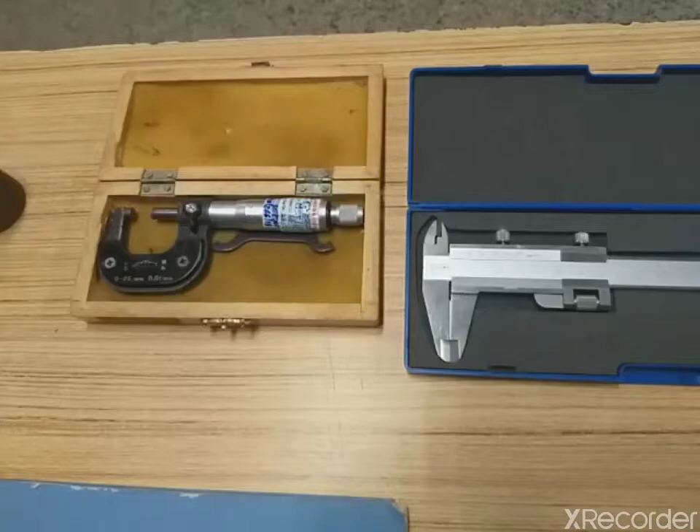In today's practical, we'll check how to use vernier caliper and micrometer for linear measurement. So the aim of our experiment is to study the use of vernier caliper and micrometer for linear measurement.

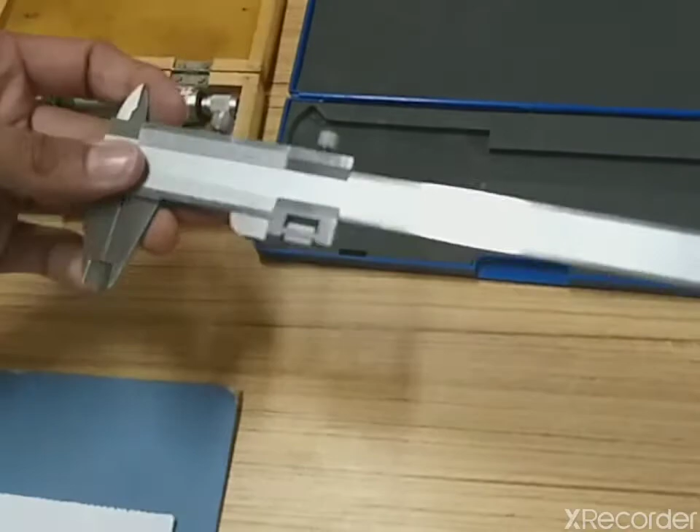So what will be the apparatus required? We will require one single vernier caliper with some specific range, then we will require a micrometer again with some specific range. But before use of this, we'll discuss a few theoretical parts related to this.

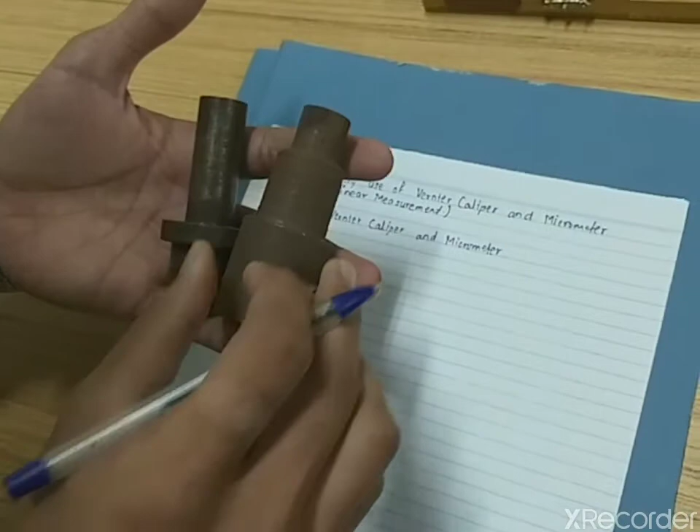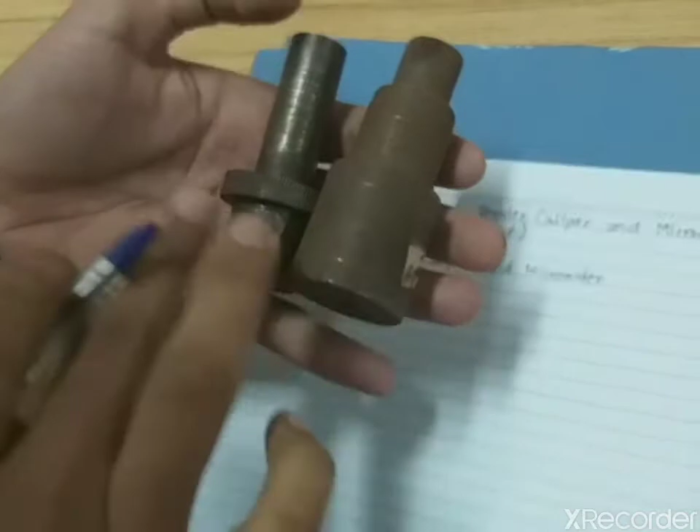So the required parts are vernier caliper and micrometer, and with that we'll require a few composite jobs whose dimensions are to be measured. Why do we call this a composite job? Because we have a number of dimensions for this, that is we can measure the length of this component or the diameter of this component. Similarly, we can have other parameters which can be measured with the help of these two experiments.

So before moving to the vernier caliper and micrometer, some theoretical part will be required. That is, important is what is the least count of any experiment. So before using any of the instruments, we should always know the least count of that specific instrument.

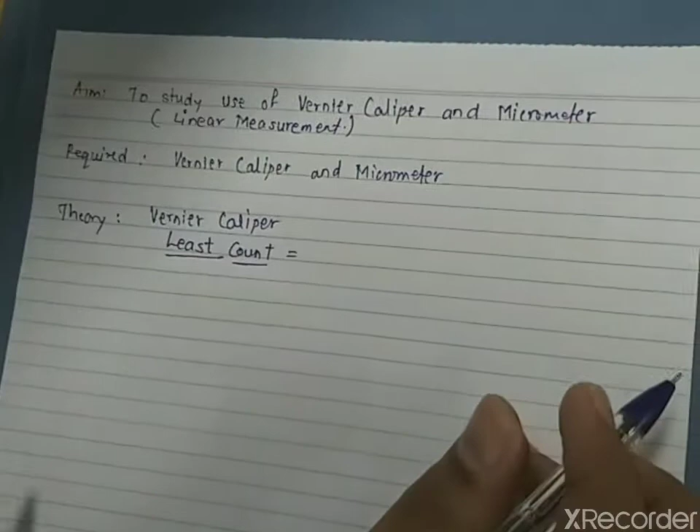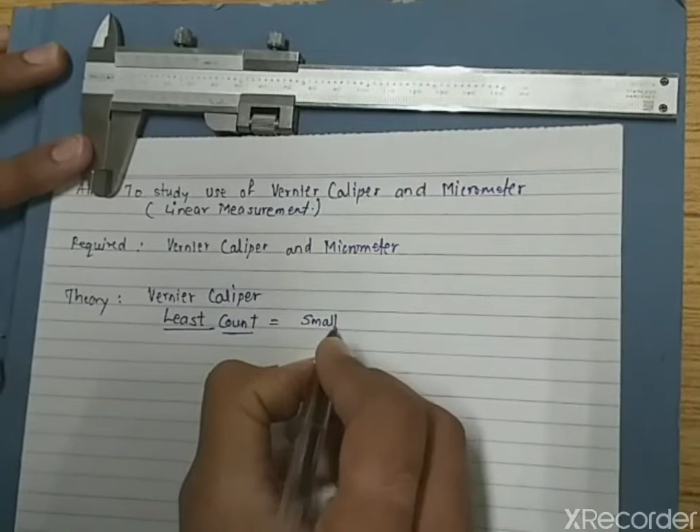So when we are dealing with vernier caliper, what will be the least count of the vernier caliper? For that, we should know the formula: least count of vernier caliper is nothing but smallest division on main scale, MS, divided by total number of divisions on vernier scale.

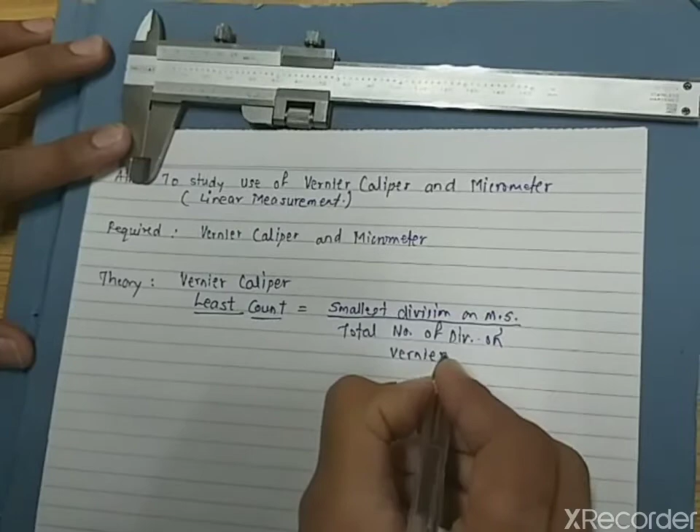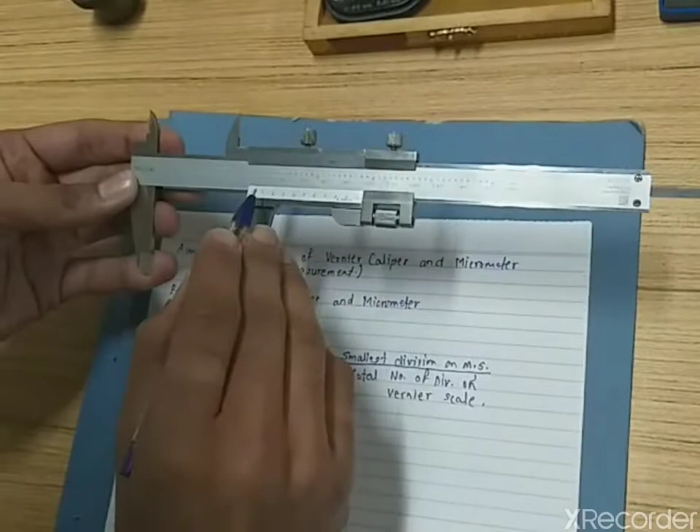So what is main scale and vernier scale? First we should understand. Now if you observe this instrument, this base scale is nothing but the main scale. With that, this movable scale which has some graduations on it, maybe in millimeters and in inches, is called the vernier scale.

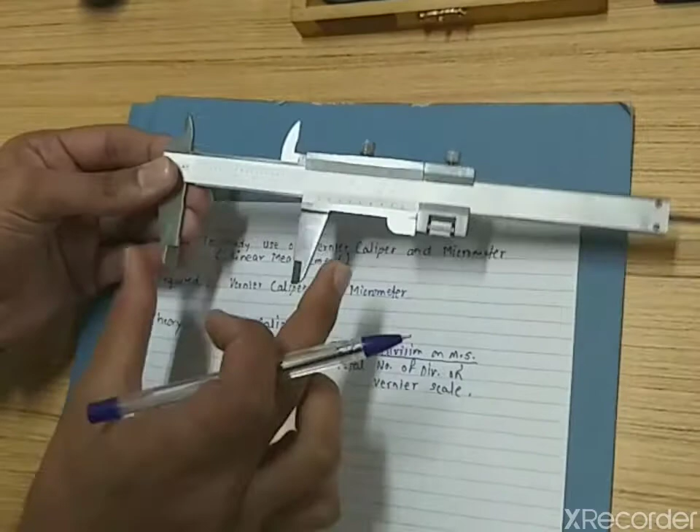Now what are the different parts? These two types of jaws are called external jaws, 1 and 2. These two components measure external parameters, whereas these are the two internal jaws of a vernier caliper.

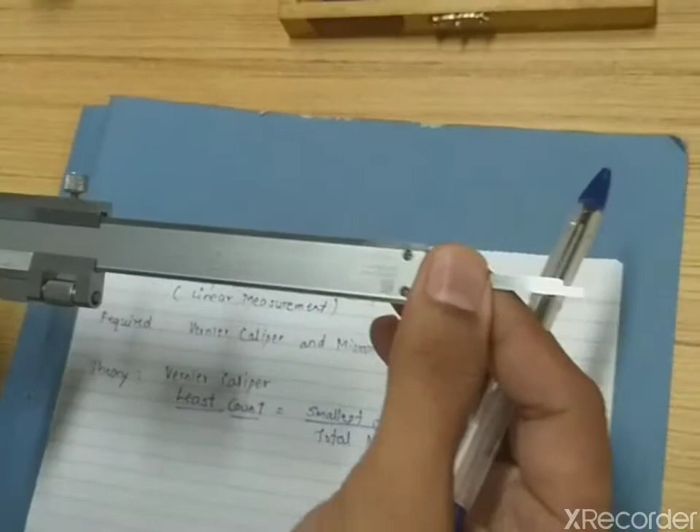With that, we have a ratchet screw for locking purpose when we use it. Another head part we have is this one, which can be used for measurement of depth of any of the component.

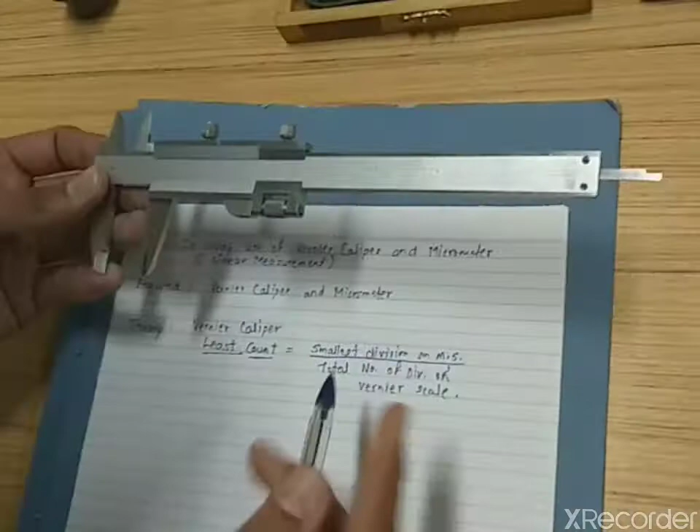Now we'll see how to use this. Before that, we'll first calculate the least count. So smallest division on main scale - if you observe it, 1 centimeter is divided into 10 parts. So obviously we can see 0 to 1, so smallest division on main scale is 1 millimeter, that is 1 mm, divided by total number of divisions on vernier scale.

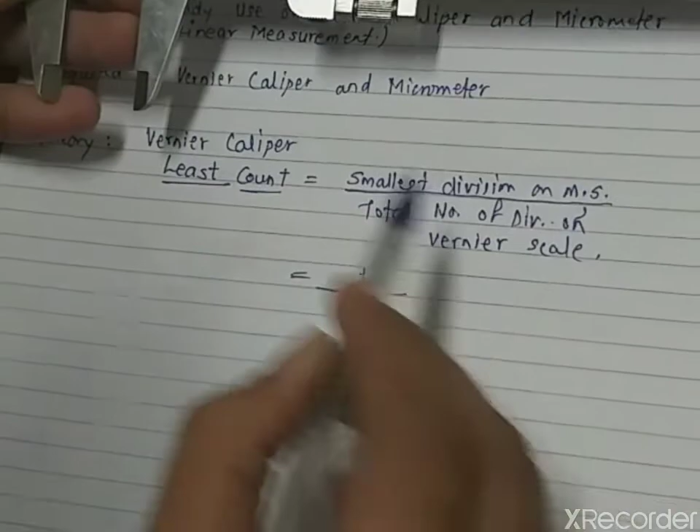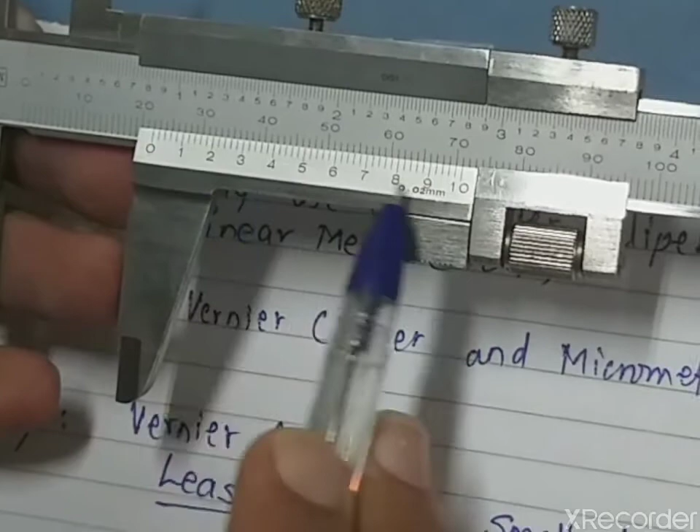This you can observe is nothing but a vernier scale. So how many divisions are there on this scale? If you observe, 5, 10, likewise till 10 we have, so total divisions are 50. If you observe total divisions: 1, 2, 3, 4, 5, 10, 15, 20, 25, 30, 35, 40, 45 and 50. So total number of divisions on this vernier scale is nothing but 50.

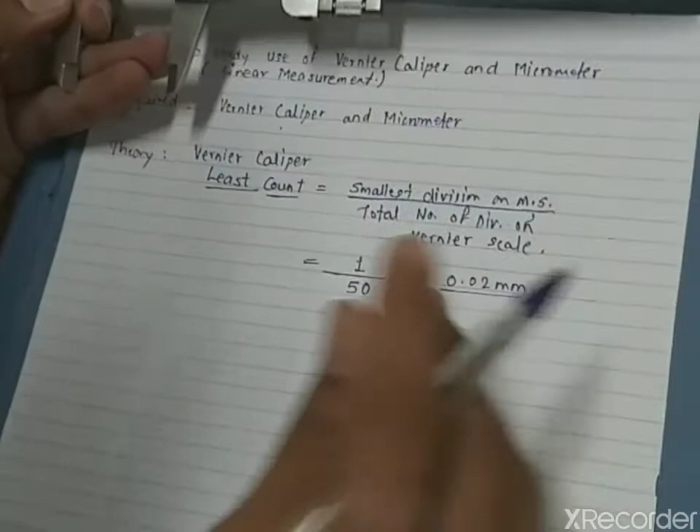So if you go for calculation, the least count will be 1 divided by 50, which is given as 0.02 millimeter. So what does this least count indicate? It indicates the smallest division which can be measured with the help of vernier scale is nothing but 0.02 mm. So this is about the least count of this vernier scale.

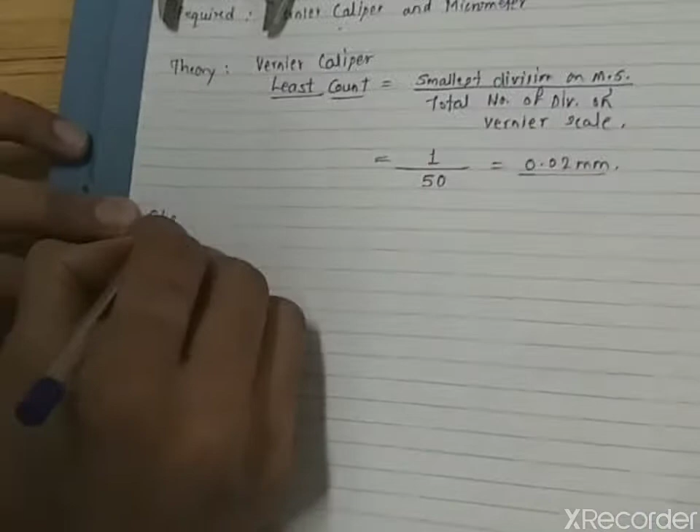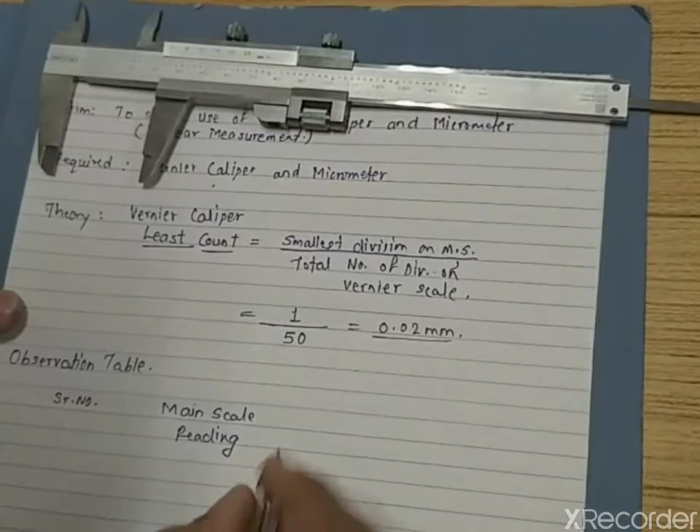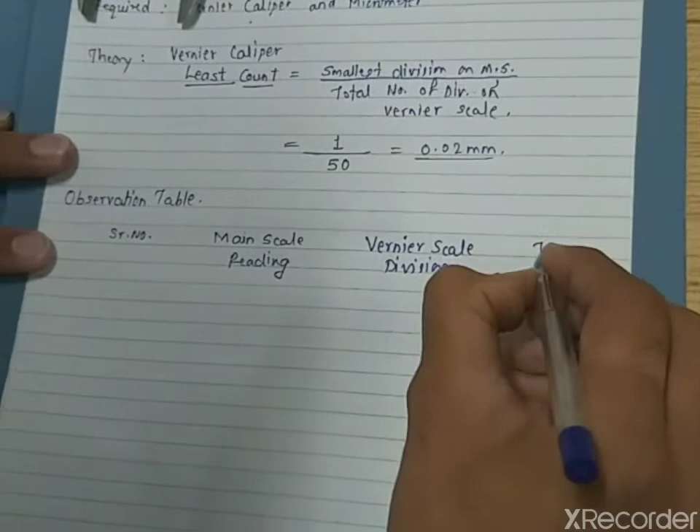Now before moving to micrometer, I will tell you how to take the reading. So I will write down the observation table for this. Now I will note down serial number, that is how many readings we are going to take. With that, main scale reading, vernier scale division, and total reading - so we will have four columns.

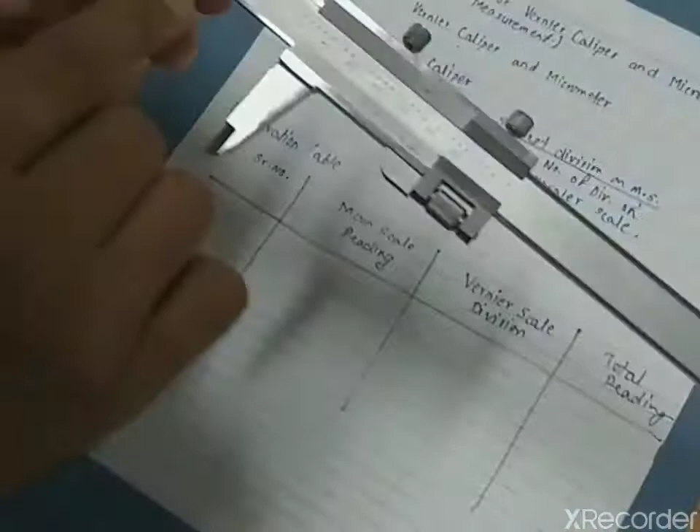So my first reading, I will show you how to use it. I am having one component, will measure the total length of this. So before measuring, what I told you - smallest division on main scale is 1 mm, whereas total number of divisions are 50. That means 1 divided by 50 is given as the least count of this experiment.

Now I will just hold this component. How to take the reading? Just hold it - this supporting grill part can be used for moving the movable jaw. Now simply hold this, we can have one set of reading over here. Now if you observe, how to take the reading - main scale reading will be nothing but, if you observe this 0, the division which is just coinciding with 0 or before the 0 will be your main scale reading.

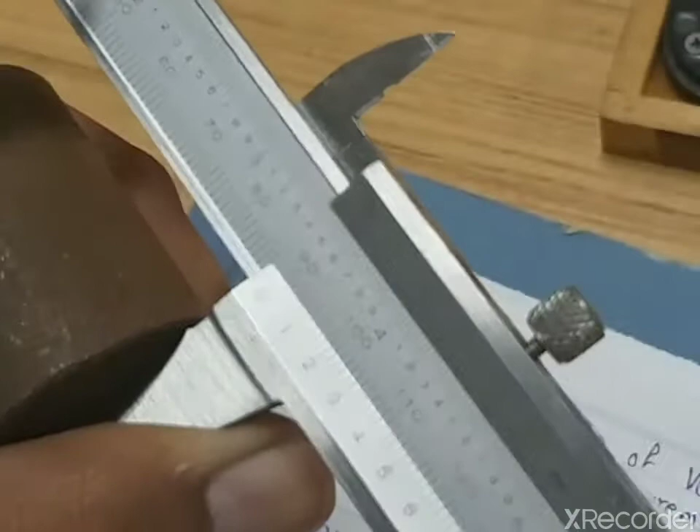Now over here if you observe, 0, 10, 20, likewise, so we have 80, 85, and just before 90 the main scale division is there before 0. So that means main scale reading is 89. So we can have 89 as the main scale reading if it is clearly visible.

So main scale reading will be 89 mm, 80 plus further we have 9 divisions. Now if you observe this gap, exactly it is not coinciding with 90 as well as 89, it is in between 89 and 90 mm. So what we can say is that middle part is to be taken with the help of this vernier scale.

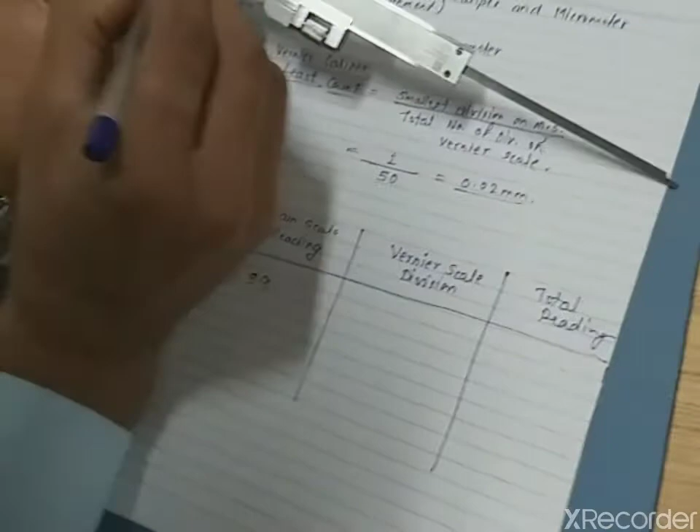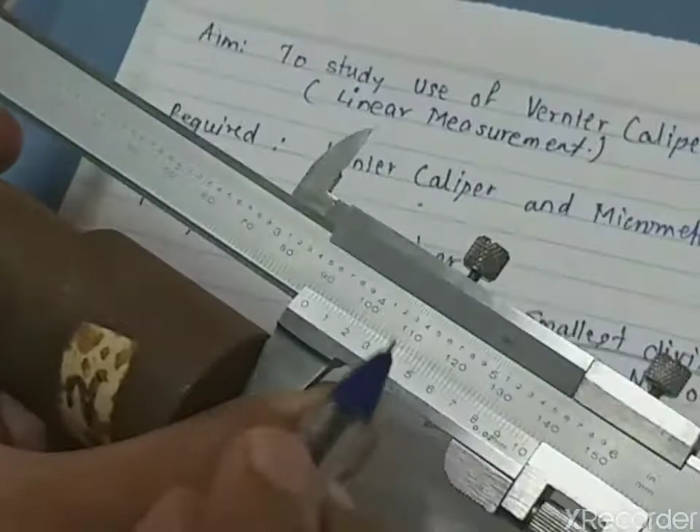Now how to take this? 89 mm we have got as a main scale reading. Now vernier scale division will be nothing but the division which is just coinciding with any graduation on the main scale. Now if you observe which one is coinciding, I will just observe it. You have to observe it perpendicularly because to avoid the parallax error.

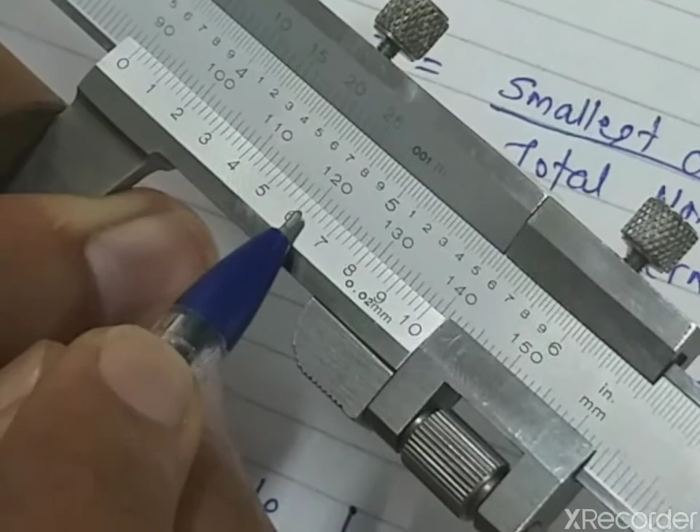So if we will check, we have exact coinciding division, we can say will be this. That means 5, 10, 15, 20, 25, 30 and 31st. So 31st division is nothing but vernier scale division, that is just after 6, which is 1, 2, 3, 4, 5, likewise 5, 10, 20, 25, 30, and 31st number division if you observe it is exactly coinciding with the main scale. So our vernier scale division will be 31.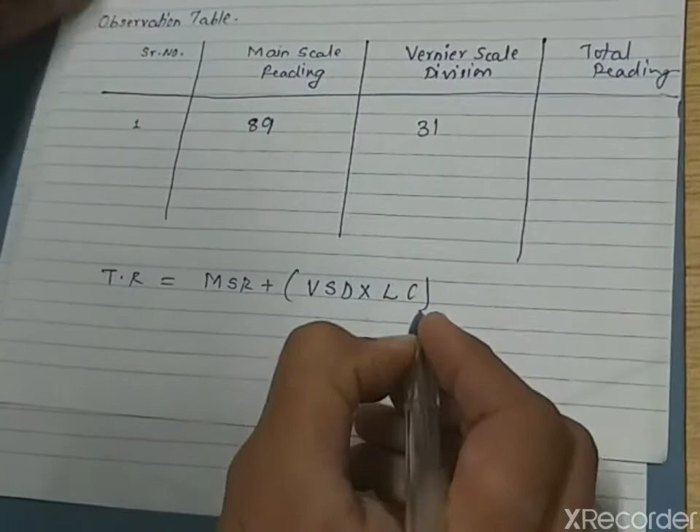Now how to calculate total reading? So for that we will require one formula. Total reading, I will write down as TR, which is equal to main scale reading MSR plus, in bracket, vernier scale division into least count of the experiment. So least count of this instrument is 0.02. So our total reading will be, main scale reading is 89 plus vernier scale division is 31 multiplied by least count 0.02.

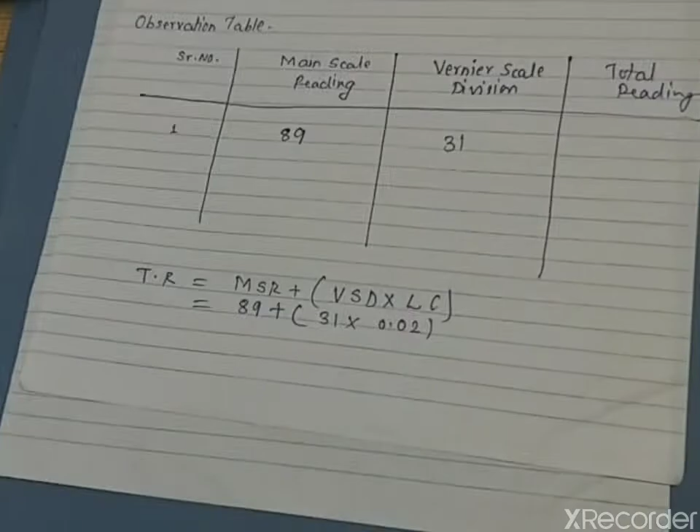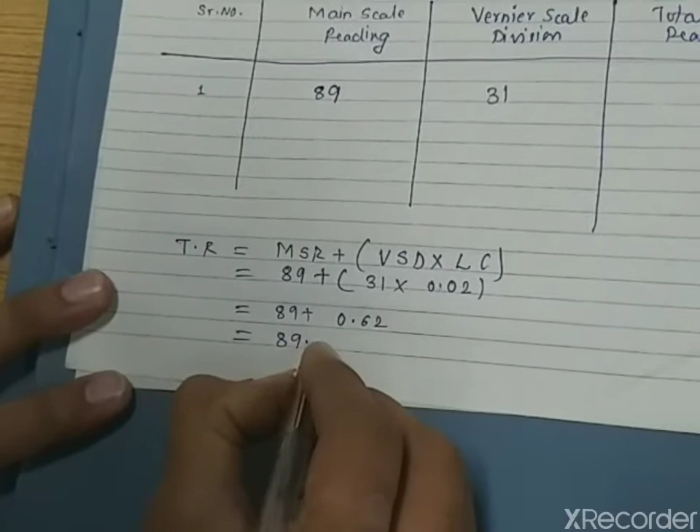So we can say that what will be total reading? It will be given as 89 plus 31 into 0.02 mm. So it will be equal to 0.62. So total reading will be equal to 89.62 millimeter. So reading, that is total length of this component, is given as 89.62.

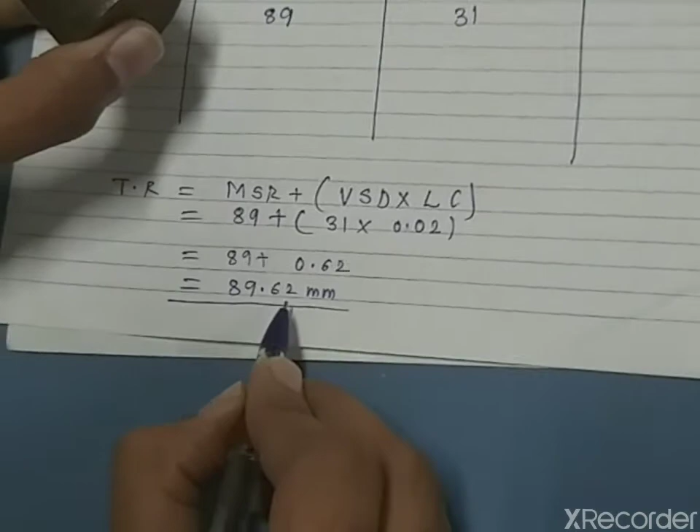Similarly, now if you want to measure, suppose we'll consider diameter of this component. So what we can do is just hold it tight. Now, so what will be the reading? If you observe, main scale reading is nothing but 30, 35, 6, 7, and it is not exactly coinciding with 38 but before 38. So main scale reading will be 37.

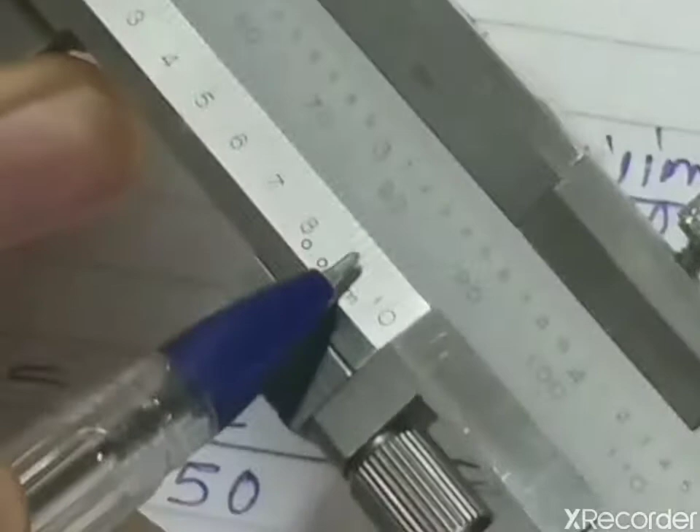So main scale reading is 37, and exact coinciding division, if you observe, will be over here, 45th division, or exactly we can say 5, 10, 15, 20, 25, 30, 35, 40 and 45th division. So exact division is 45th.

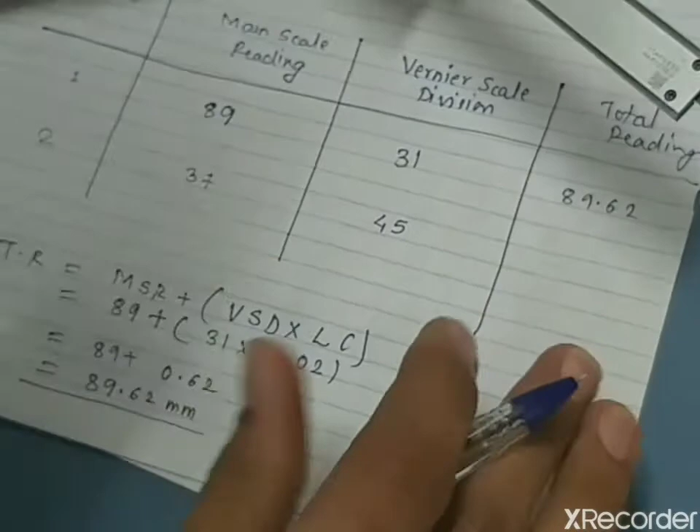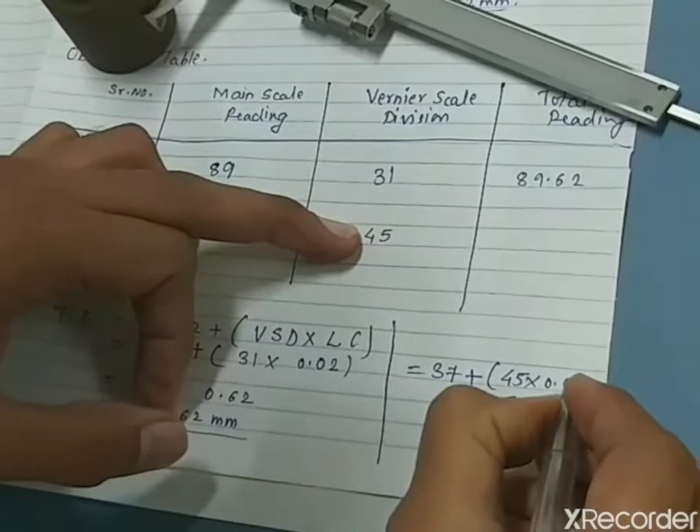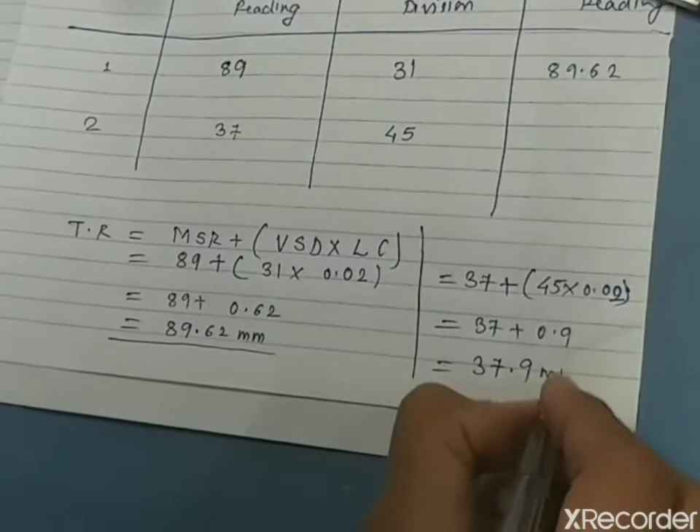So total reading will be equal to, another example we can say, main scale reading plus vernier scale division into least count. Which will be given as main scale reading is 37 plus vernier scale division is 45 into least count of this instrument is 0.02 mm, which is given as 37 plus 0.9, which will be equal to 37.9 millimeter. So total reading will be equal to 37.9 mm. So in this way we can use vernier caliper.

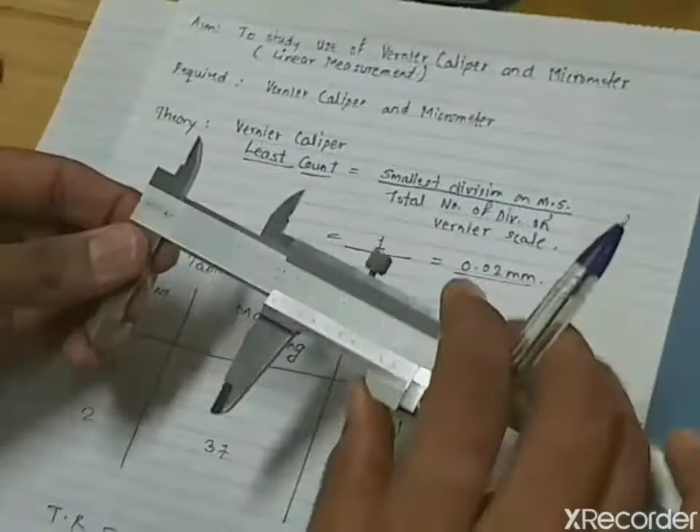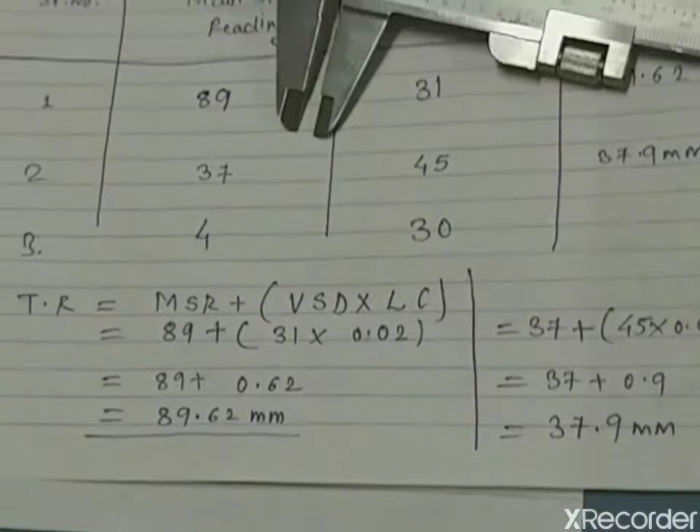So if you want to measure internal parameters in similar pattern, we can just hold this above internal jaws, set the reading. What is the main scale reading? Exactly it is 4 mm suppose. So we can say 4 mm will be your main scale. Coinciding division, if you observe, will be nothing but suppose 30 number division. So 30 into least count, that is 0.6, and plus 4, that means 4.6 millimeter. So this is all about how to use a vernier caliper.

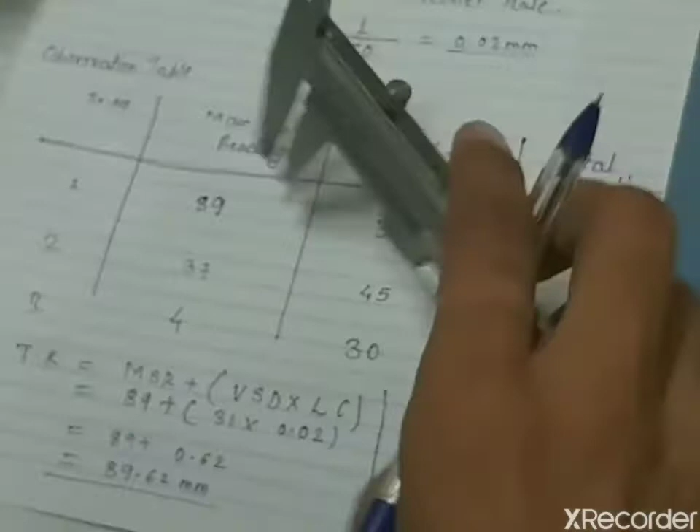So internal parameters, this whole dimensions we can measure, or if you have to use the depth, so the depth of this can be measured with the help of jaws. Just simply hold it in this way, it will be fixed, and then we can note down the main scale reading, which will be equal to 32, and coinciding division, suppose it is again 20. So 20 into this, in this way we can use vernier scale.

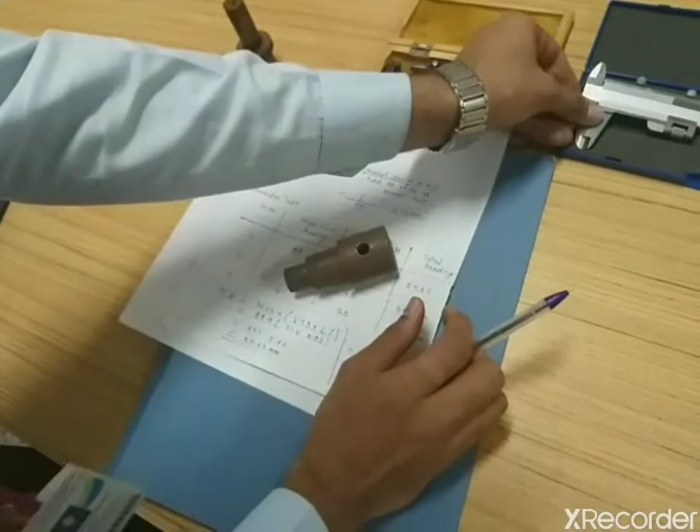So this was all about the use of vernier caliper. Now we'll go for discussing micrometer, so use of micrometer. Now for that again what we require is least count of micrometer. So there is some sort of change in the formula of vernier caliper and least count of micrometer.

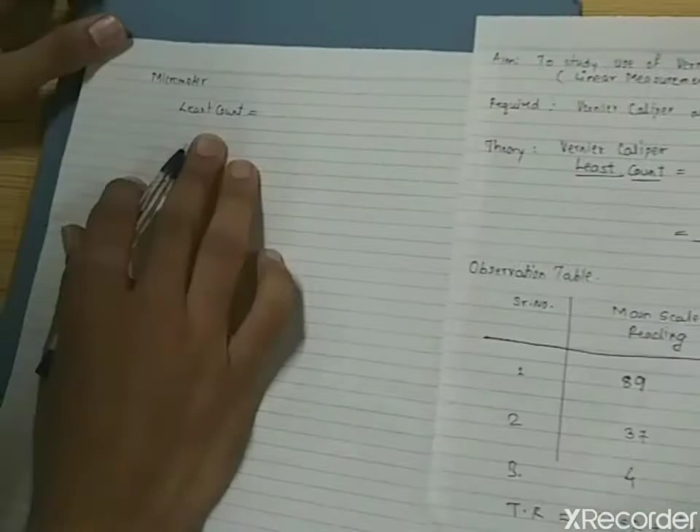So it is given as, if you observe the micrometer, what are the parts? First we'll discuss. This is nothing but anvil, spindle, because spindle is movable. With that we have C section. This is the locking nut, which can be used for locking these two spindles. Then we have this barrel or main scale. We call this barrel as main scale.

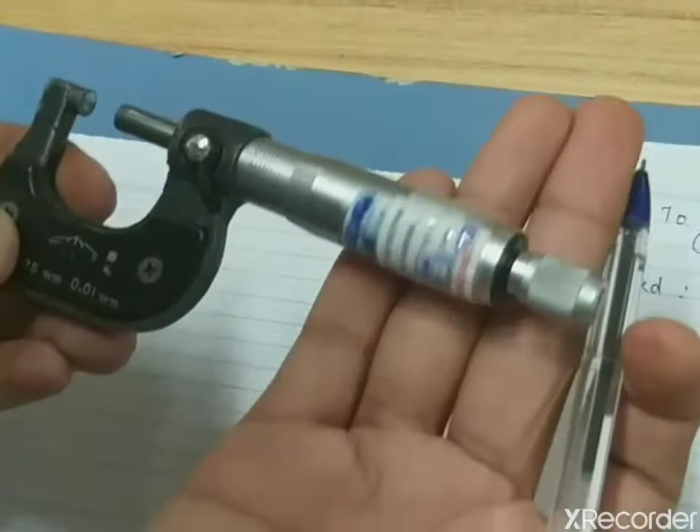Then the movable part, we call it as a circular scale. Some graduations are provided over here. We call this as a circular scale, or we say in technical or metrological words as thimble for this. And then we have a ratchet screw. Ratchet screw is used for just fixing the component.

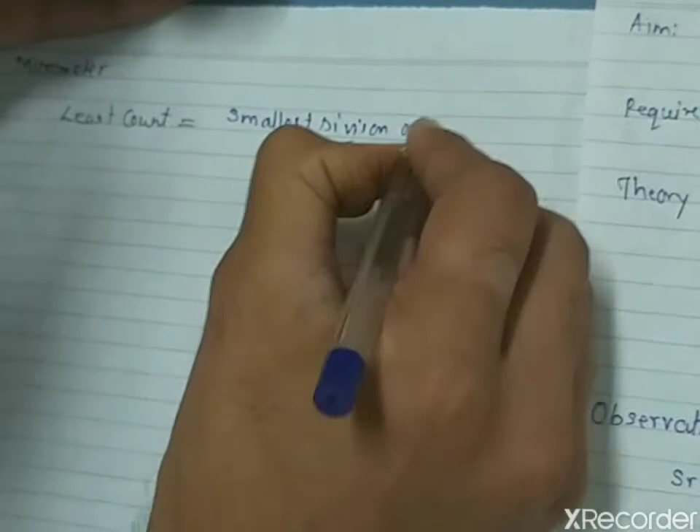Now how to calculate the least count? So smallest division, formula for this will be smallest division on main scale, MS, divided by, now instead of vernier scale we have circular scale.

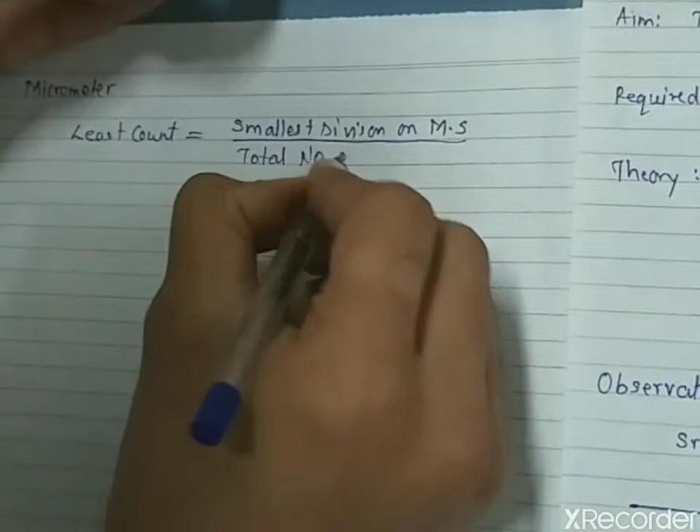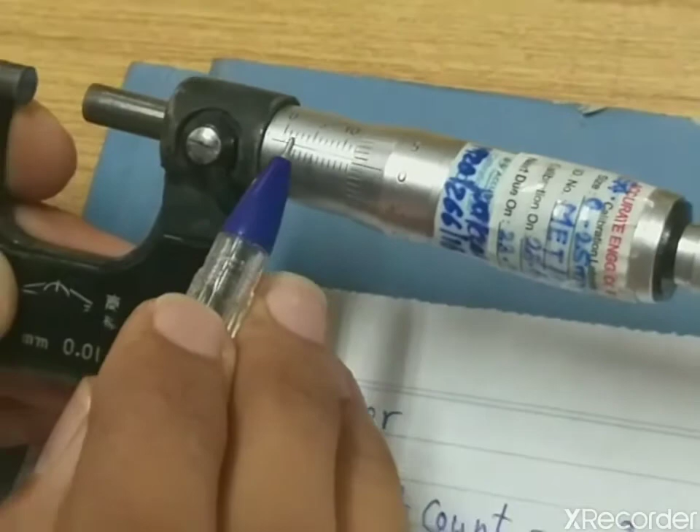So total number of divisions on circular scale, that is CS. If you observe, it starts from 0, 5, 10, 15, likewise up to 50. So least count of micrometer will be given as: now smallest division is 0, 1, 2, 3, 4, 5 mm, but below that in 1 mm it is again made half, so 0.5 mm, 1, 1.5 mm, 2, 2.5 mm. So smallest division on main scale is 0.5 mm divided by total number of divisions on circular scale, which is 50.

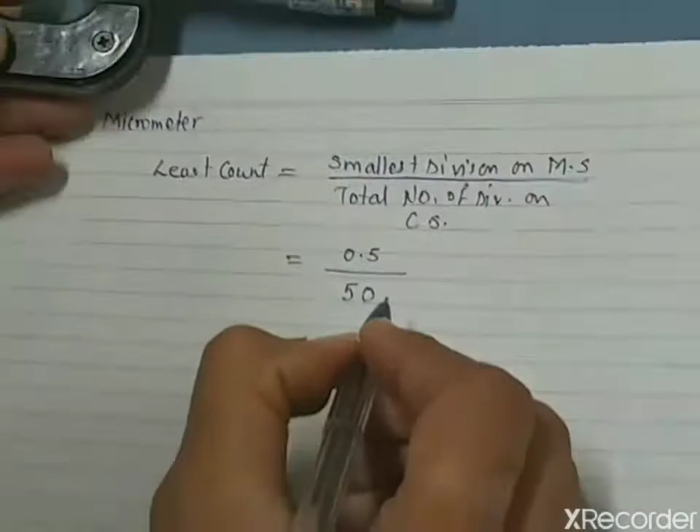So what will be the least count of this instrument? It will be equal to 0.01 millimeter. So least count of micrometer compared to vernier caliper is 0.01 millimeter.

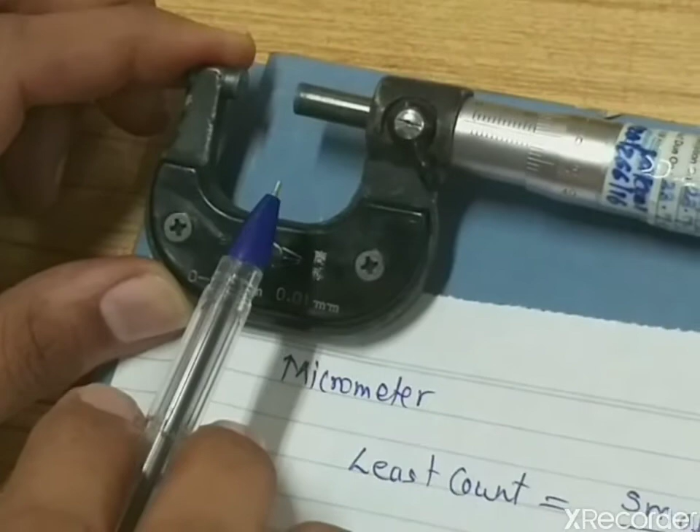Now one extra parameter is shown over here, that is range of the instrument, that is 0 to 25. So range of this instrument is how much size this micrometer can measure. It will measure starting from 0 to 25 mm, so beyond that we have to change this micrometer and use another micrometer.

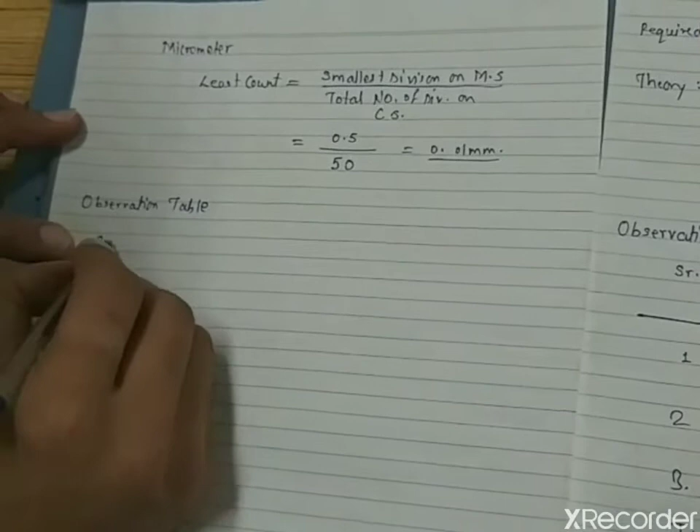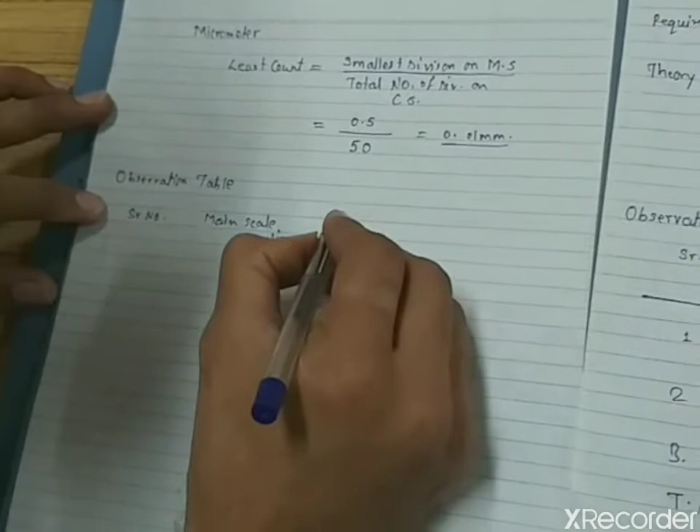Now I will just show you one example. So observation table again I will write: serial number, main scale reading, and instead of vernier we have circular scale division, and total reading.

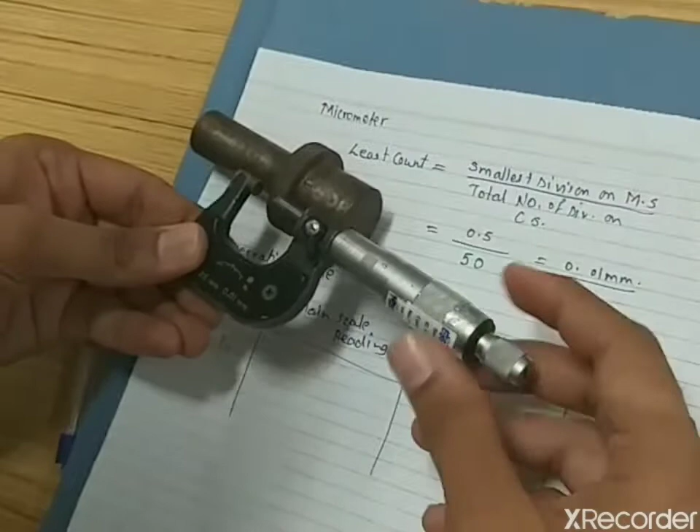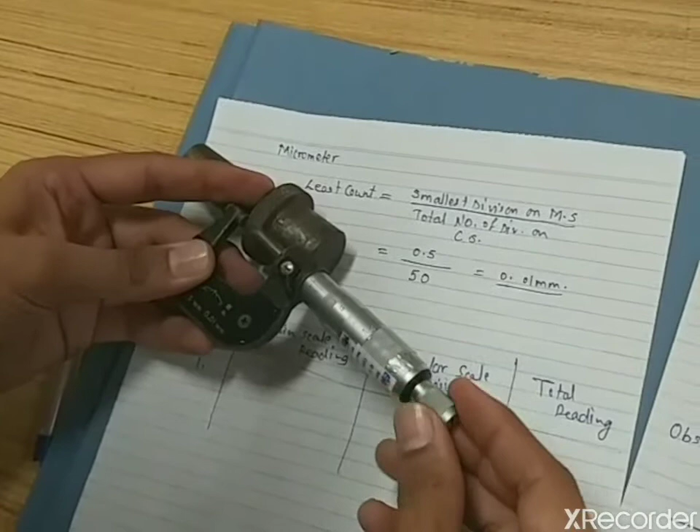First parameter, now how to use it, I will just measure the thickness of this. For that just use the thimble for faster movement. And if you observe, there is one sound, that is tick sound - 3 times you have to hear this, 1, 2, 3. So exact pressure is reached, we can say, and now we can take the reading.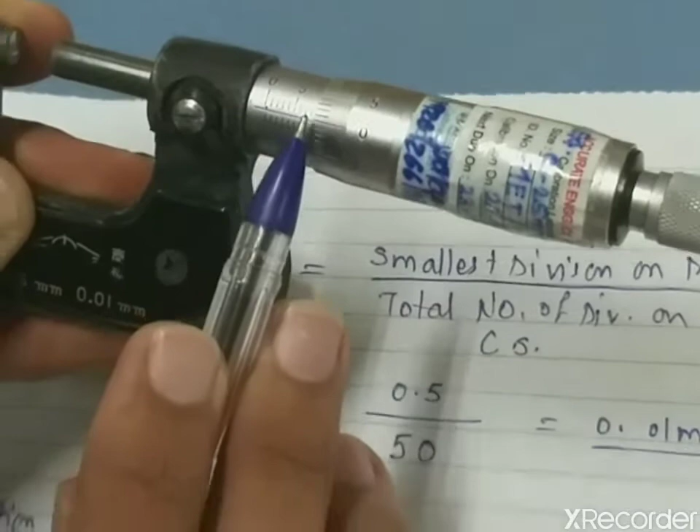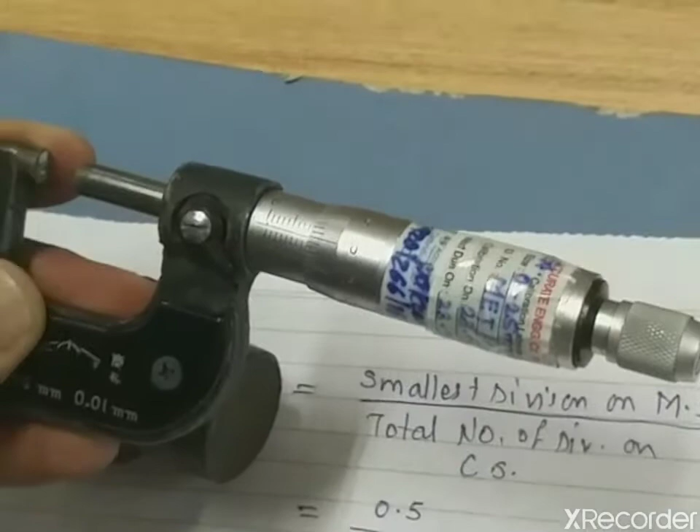So what will be the main scale? Over here main scale means the division which is visible. So we can see that 5, 6, 7, 8 and half part below is below the index line - you call this the index line. So below that line is visible, that means 5, 6, 7, 8 and 8.5 mm will be your main scale reading.

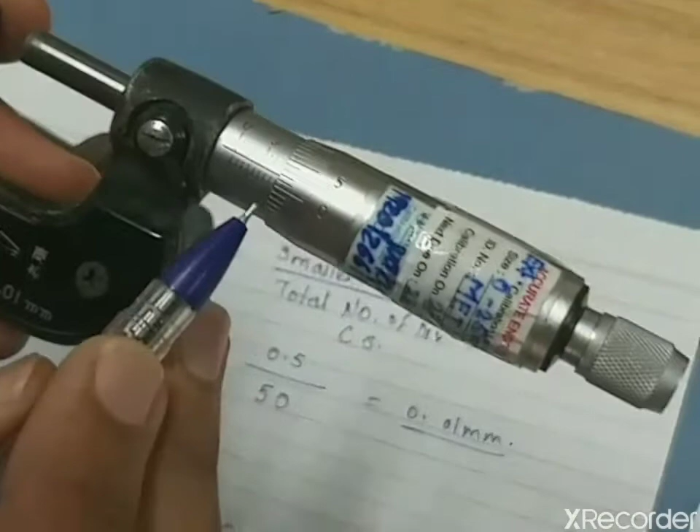Now what will be circular scale reading? So if you check exactly over here - I have just disturbed it because it was clearly coinciding. If you observe 0, 1, 2, 3, 4, 5 likewise, so index line will be our reference line now. So it is between 1 and 2, so the line which is just below the index line will be 1. So first number division we can say 1.

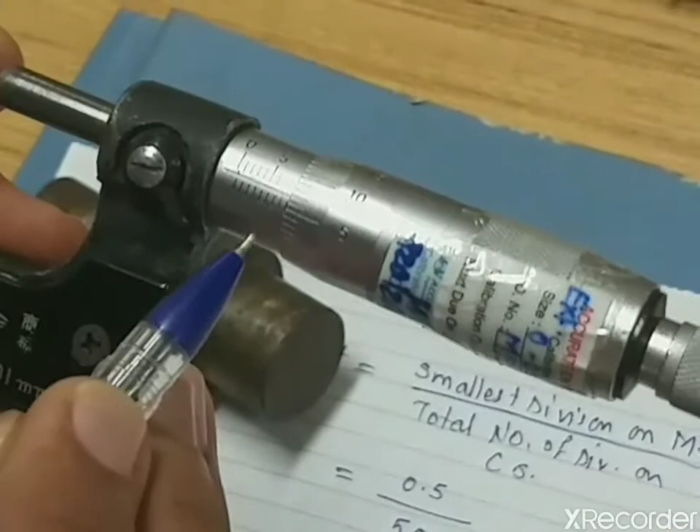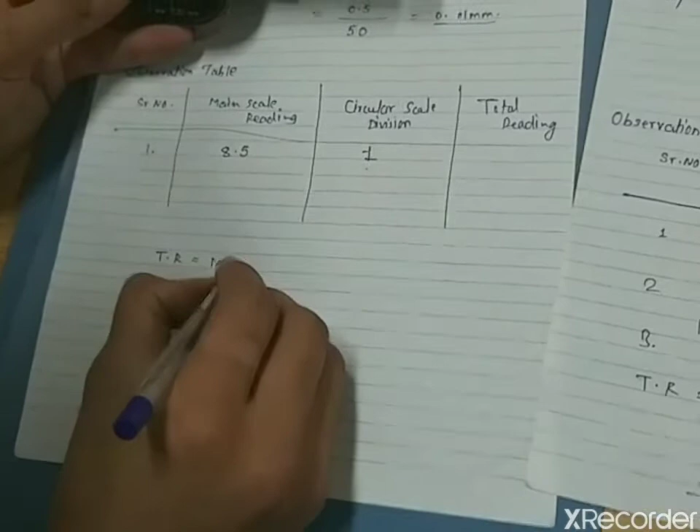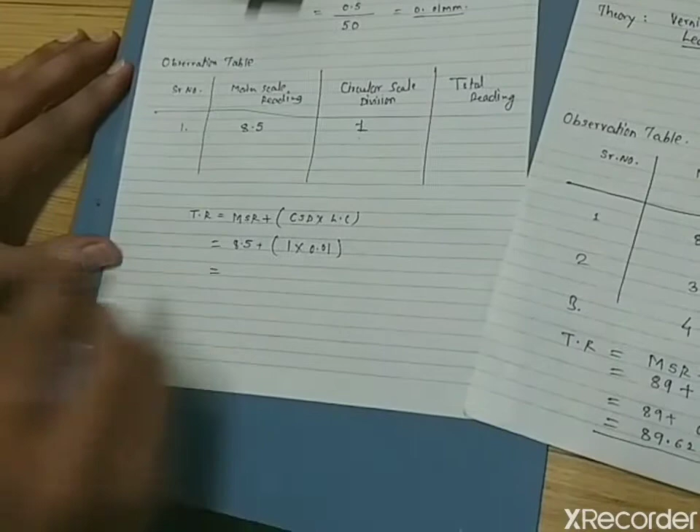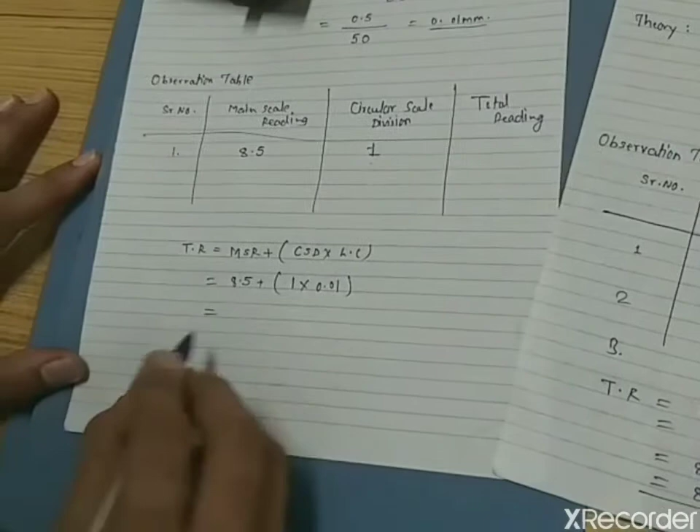So total reading will be equal to TR = main scale reading plus (circular scale division into least count of the micrometer), which will be equal to main scale reading as 8.5 mm plus circular scale division 1 into least count 0.01 mm. So total reading: 1 into 0.01 is 0.01 mm plus 8.5, it is nothing but 8.51 mm. So total reading will be given as 8.51 millimeter.

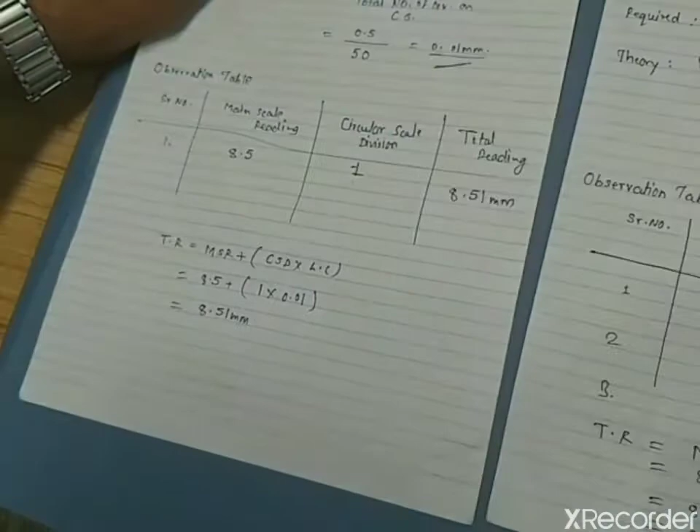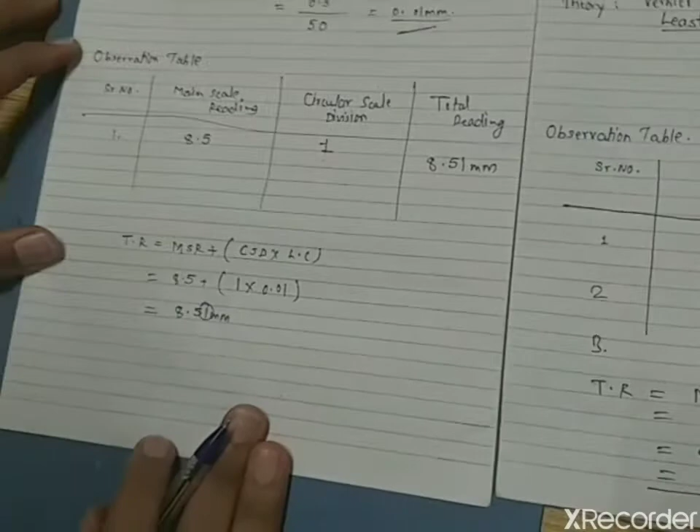So if you observe, least count of micrometer is 0.01 mm, and least count of vernier caliper was 0.02 mm. So always you will get reading in even terms - that is over here last numeral is 2, over here we have 1. So in this fashion multiple of 1 and multiple of 2, you will get the reading up to second digit. So this is all about how to use the micrometer and vernier caliper.

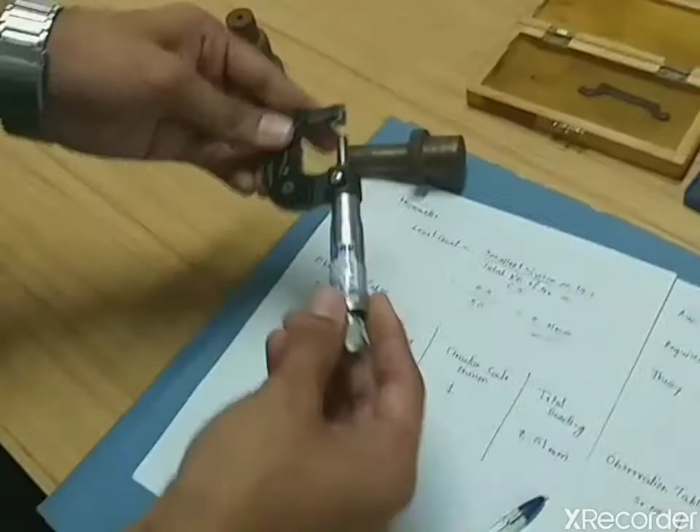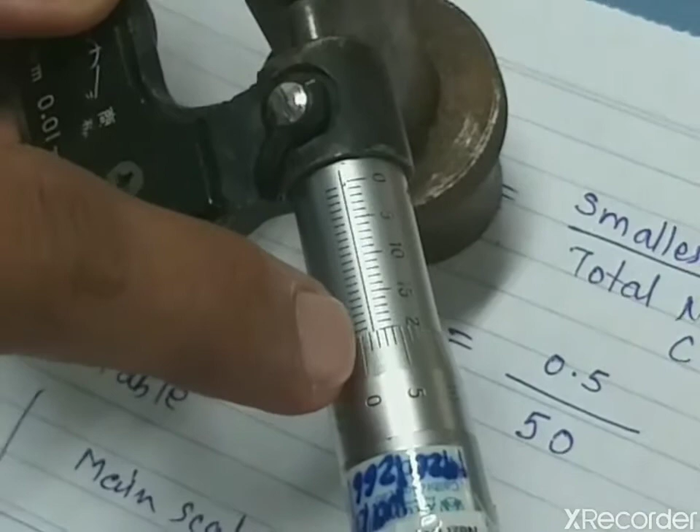So using micrometer we can measure another parameter such as diameter of this. So if you consider in this way, we can go for diameter measurement of this. Note down the main scale reading, it is exactly coming 20, and the coinciding division is again 2, because 3 is not coinciding and 2 is just below the index line. So 2 into 0.01 mm will be your circular scale division into least count, and again add the main scale.

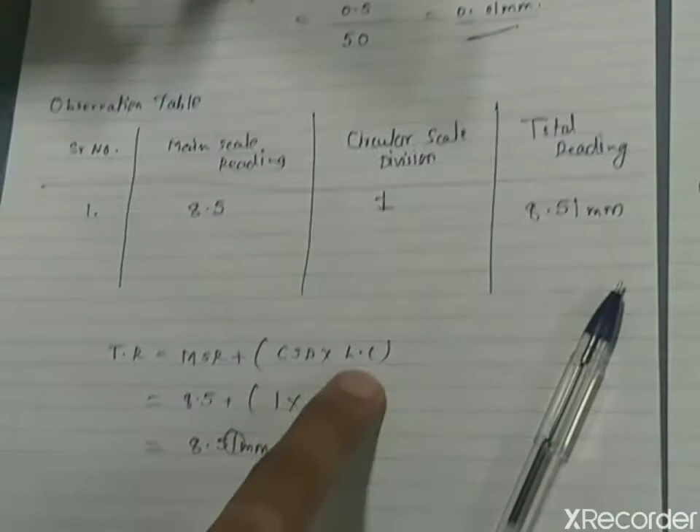So in this way we can have the linear measurement, or we can perform our first experiment, that is use of micrometer and vernier caliper for linear measurement. So thank you for this session.